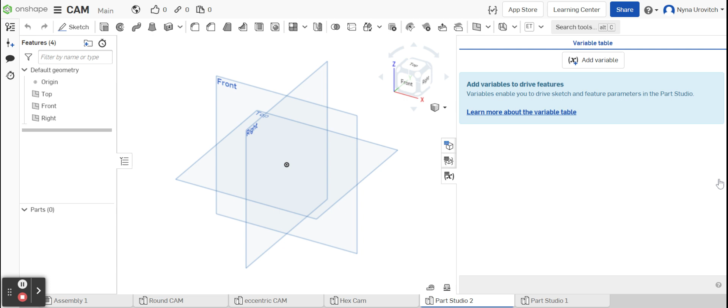First, we're going to define our variables. We're going to go to add variable, and the first variable is the nominal dimension. We're going to call it D for dimension, and it is 2 inches. Next one that we're going to do is going to be the hole, and that's going to be 1/4 of an inch. And of course, we're using a square that's 1/4 of an inch by 1/4 of an inch. And the extrusion is also going to be 1/4 of an inch.

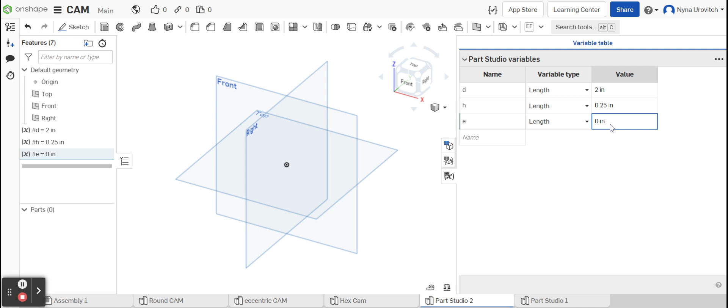Great. And so here we are. The extrusion is done. The variables are done, and we're going to go to the front view. We're going to go to front, and we are going to start off by drawing. We're going to draw some arcs. We're going to do a top arc, a bottom arc. Then we're going to join them with tangent lines.

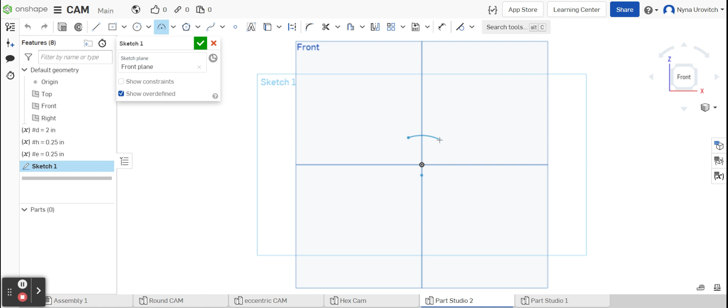So here we go. We're going to go sketch, arc, and the arc should be almost a circle. My first point, my second point, and we're going to go just like that. I'm going to make the center point of the arc coincident with the center by using the coincident constraint. Here we go.

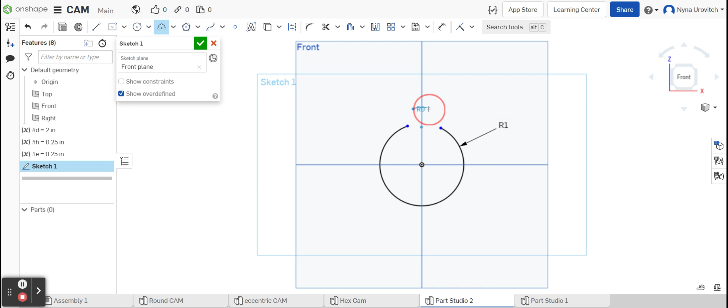They are coincident. I'm now going to also dimension it to be, I think the arc is D over 2. Okay, D over 2. Okay, our first arc is done. The second arc we're going to do is in the opposite direction. We're still going to use the 3-point arc, and we're going to go 1, 2, and this is what it's going to look like, 3. I'm going to dimension it. It's D over 8.

Originally, I did circles and trimmed it, but I found this way was more consistent. I was able to get it right because when I trimmed it, sometimes the radius and the diameters did not match. So I figured let's keep it as a radius because that was what the drawing has. Okay, we're going to now do a coincident constraint.

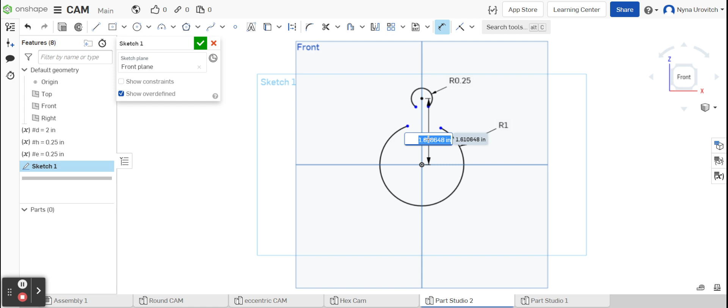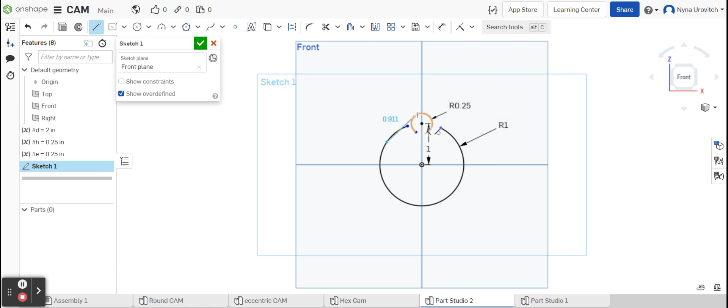Again, this point goes on the center line, moved over, great. And now we have D over 2, or actually 1 inch between the two centers. Okay, I'm going to go D divided by 2. Great, and now we're going to draw a line that's tangent to both circles. I'm going to start something like that. Okay, this is kind of like what it's supposed to look like.

And I'm going to create the tangent constraint. This is the tangent constraint, and the line and the circle. And there we go. That's where it's tangent. That means that the line just barely touches the side of the circle. Now I'm going to do this side just to make sure it's tangent. I'm doing this and that. Okay, and those are tangent.

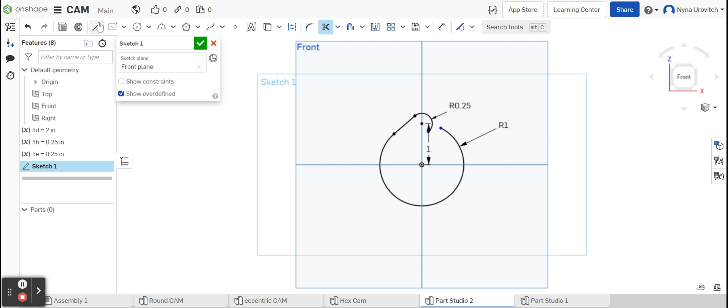Excellent. And now I'm going to trim them. And it's starting to look like the image that we're copying. Now let's do the second line. Okay, let me get out of line draw, use the tangent constraint, line to circle. Great. Line to other circle.

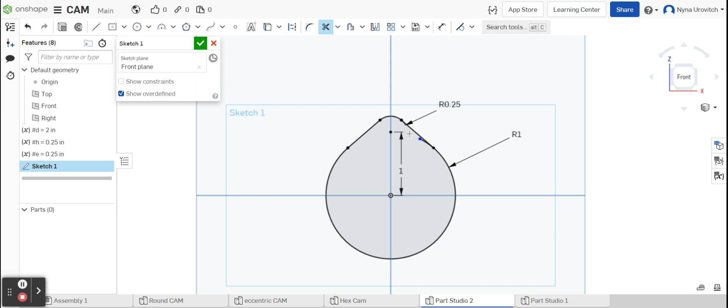Okay, and that's where they're tangent. Everything went black, so we know everything's accounted for. And now let's just do some trimming. Okay. And we are all set. Now we're going to create the center point rectangle. I'm going to go to the center, create the rectangle.

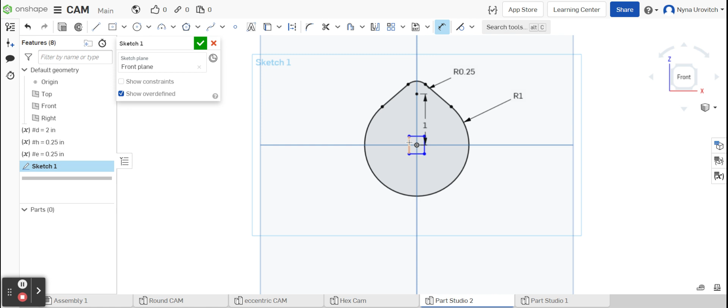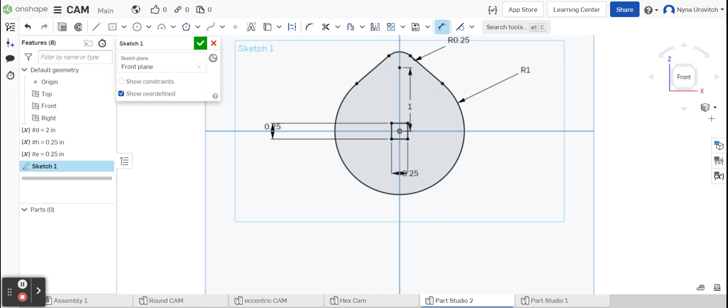Now we're going to dimension it. And we're dimensioning it as the hole, 1/4 inch. The hole, it's 1/4 inch. Okay. We're going to go isometric. And it looks good.

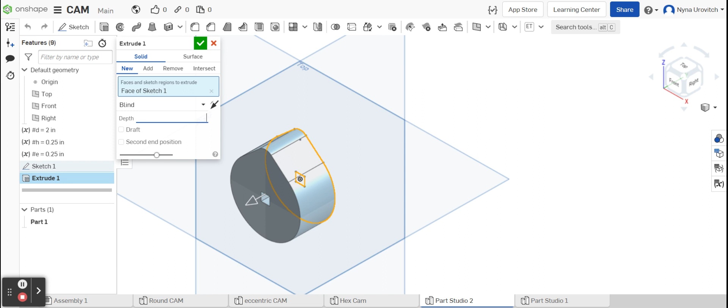The next step is we're going to extrude. So let's accept the sketch. I'm going to take it. We're going to extrude it. And we're extruding it by 1/4 inch, but we already wrote it. And here we go. That looks very good. This is what the Pear CAM looks like. It's exactly like our drawing.

And let's go to the isometric view. Let's change it. And we will call it Pear CAM. Right click, rename Pear CAM.